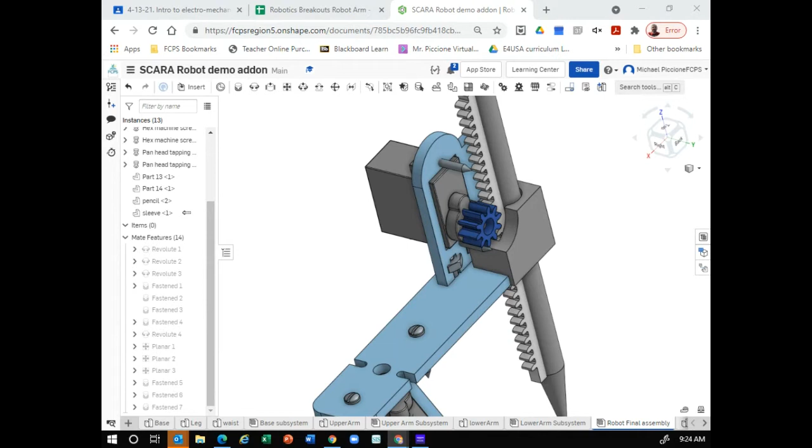All right, so this is how to 3D print something that you made for your arm. If you want to 3D print it, once you've made it, you can find the material, the part over in the menu, and you're going to say export. You want to export it as an STL.

Before you export, make sure your units are in centimeters. So go change your workspace units to centimeters, because when it exports units, it does not export a measurement, it just knows it's so many units wide. So if you export it in millimeters, it makes it really small. If you export it in inches, it makes it really big, when all the 3D printers are set up for centimeters. So right click, export.

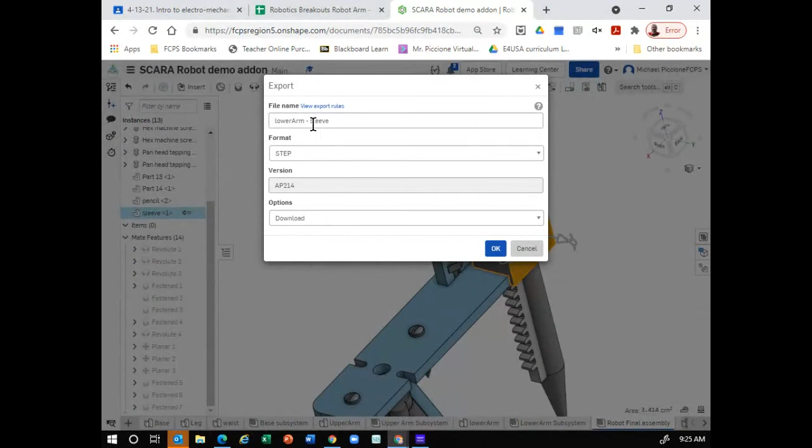You're just going to say download is fine. And it says you'll receive a notification. Takes about 10 seconds usually. There it goes.

Oops, I did a step file. I meant to do STL. Let me do it again. Export. STL, give it a name. Resolution you want fine. Download. Okay.

So now, if you want me to 3D print something, you're going to want to take this file and save it to a certain location. And we're going to save it in my robot file part.

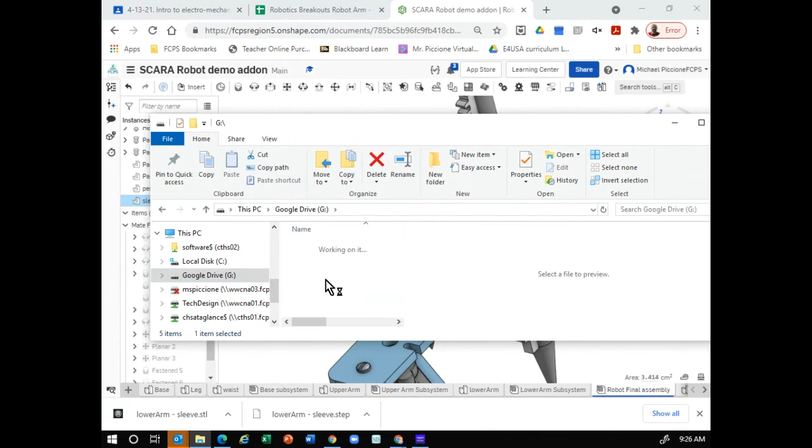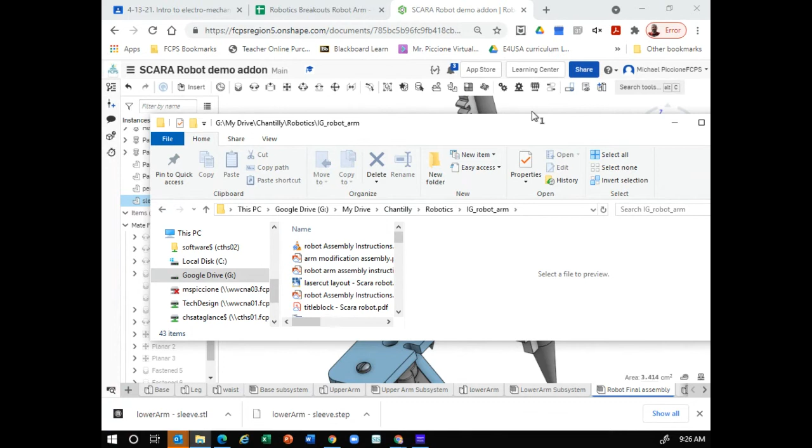Oops. I don't think I copy pasted, did I? Nope. Let's go back to that.

All right, so download, you're going to say cut, go to the location you want to save it to. Paste it there.

Now you can upload this part to the Google assignment, and make sure you put in the Google assignment what units you used to export it as and how many you need. And now I can double check when I 3D print the part for you so I don't mess it up.

All right, so let me go back to my piece here and change my units back to inches for the next step. All right.

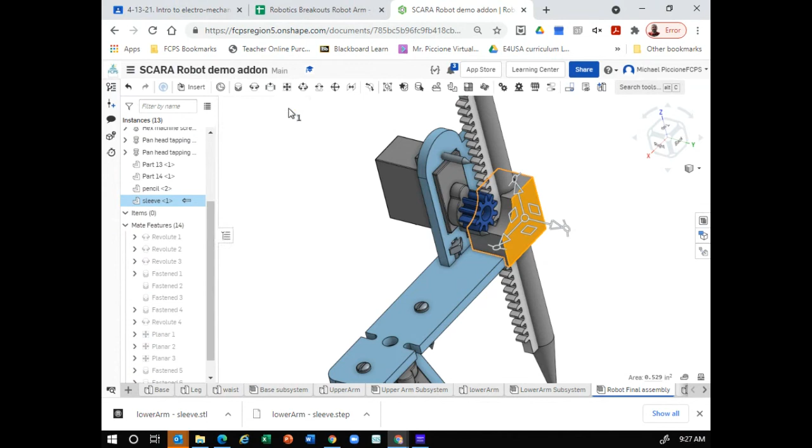So for the last step, you want to lay all your parts out for 3D printing, for laser cutting. So to do that, we want to start a new assembly, and insert all your pieces and lay them flat that are laser cuttable.

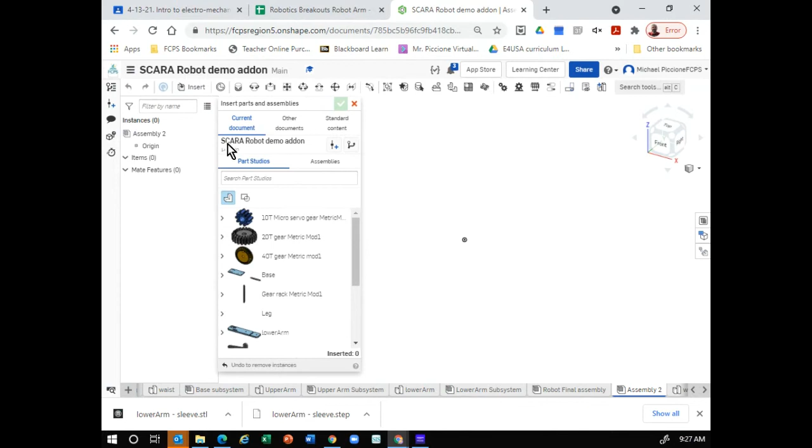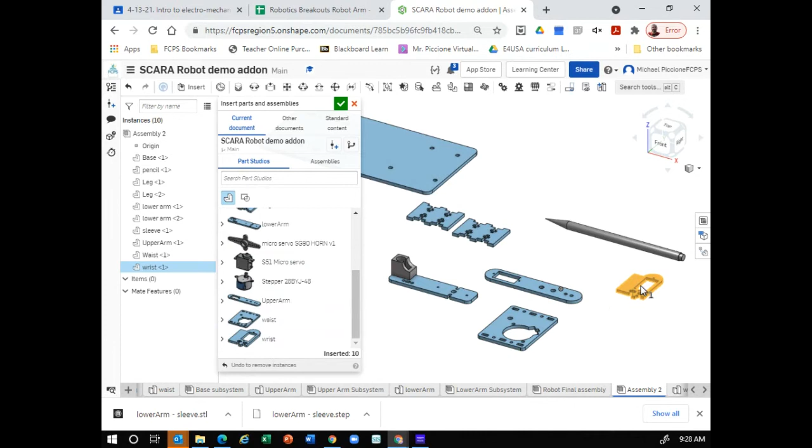So for example, the base, the leg - you got to do the leg twice - lower arm, ignore that piece, we'll delete it in a minute, upper arm, waist, wrist. I think that's all. And then you can delete out all the parts you don't want. So we don't need this guy here. Let's delete the sleeve. Let's delete my pencil.

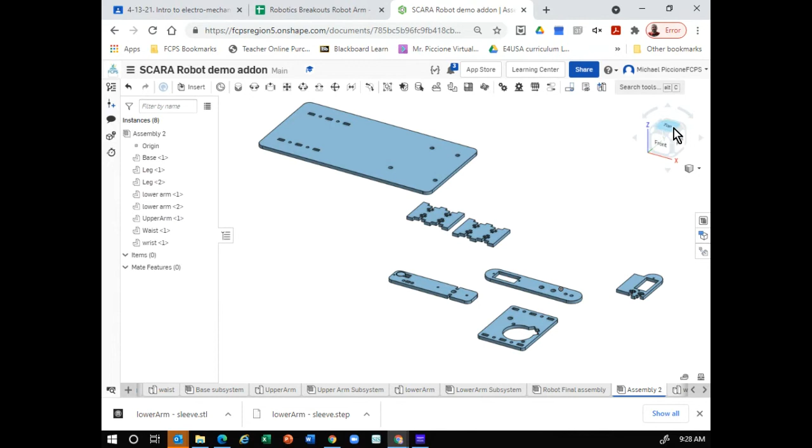So right now you can see they're all on different planes. You don't really need to do planar mates to get them all in the right spot. But what you want to do is lay them all out as close together as humanly possible without touching.

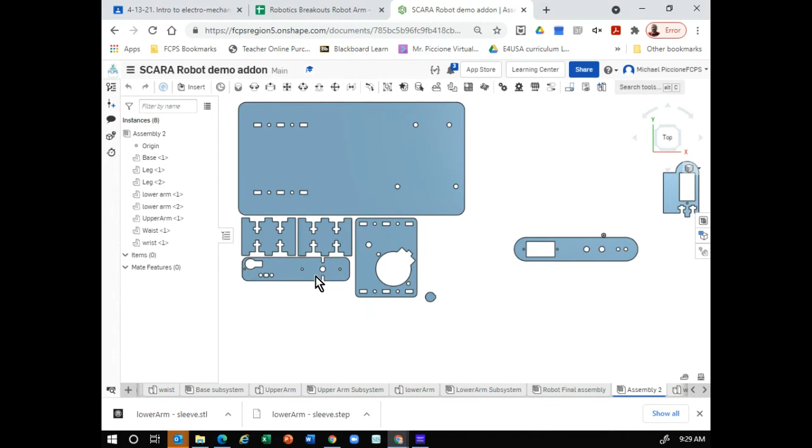You can use rotate if you want, using the transform function if you want to spin things around, but that takes extra time. Oh, there's that little weird mistake I made. Let's delete that guy out of there. So that looks pretty darn close there.

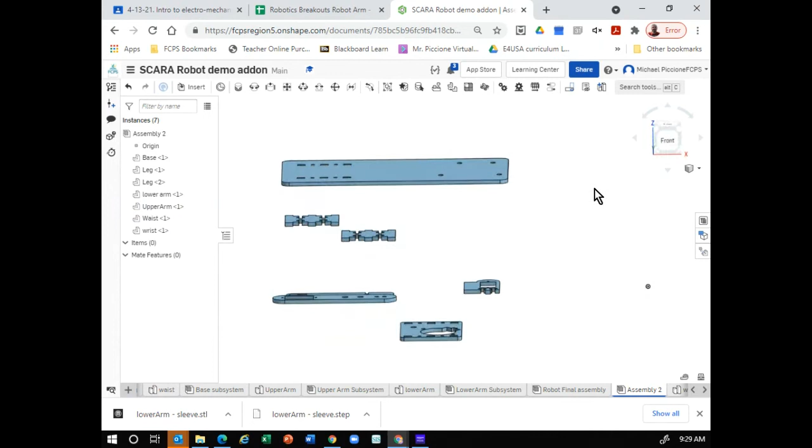The goal is to have everything in a piece of material that's less than a foot. So then you're going to look at the top piece and put a sketch on it. Oh, well, that's right, first we got to say edit in context, I think, in this. Let me see.

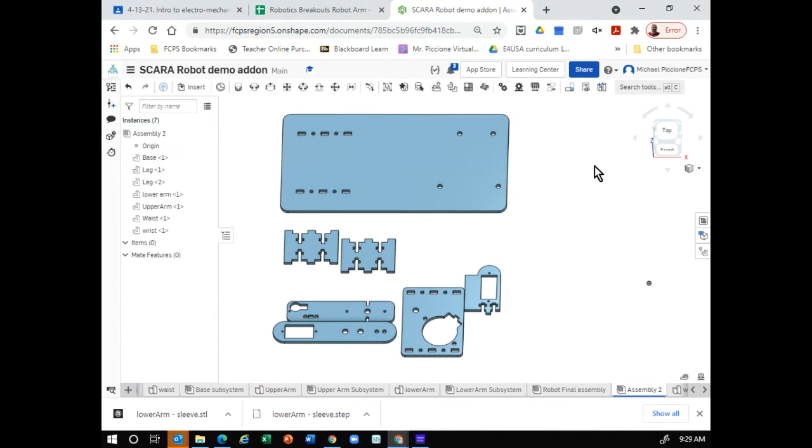Actually, no, I forgot, that's right, we wanted to do... where is that button I want? I think there's a way to create a part studio from this, and I got to remember how to do that. Create part studio in context.

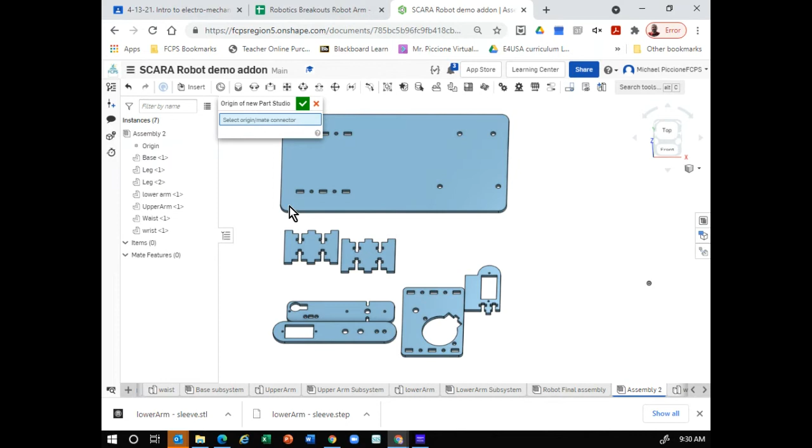The origin, let's see, you got to click a piece. Mate connector. Let's see if I can find something to attach it to. There we go, let's just use the origin. All right, there we go. So now I kind of see an outline of all my pieces.

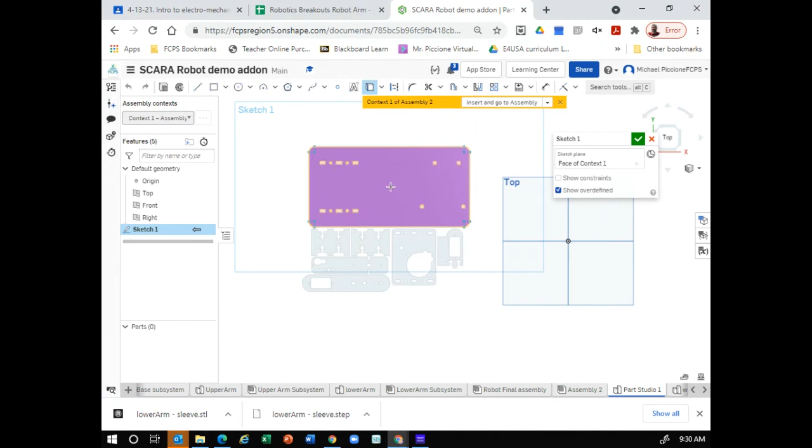I need to make a sketch, and I can do it on the top piece, it's fine. And you're going to project all your edges, every piece, make sure it gets all the details. If you use the rectangle draw tool, it'll grab things too, if you draw a box around them, so you got to make sure you get all of those circles.

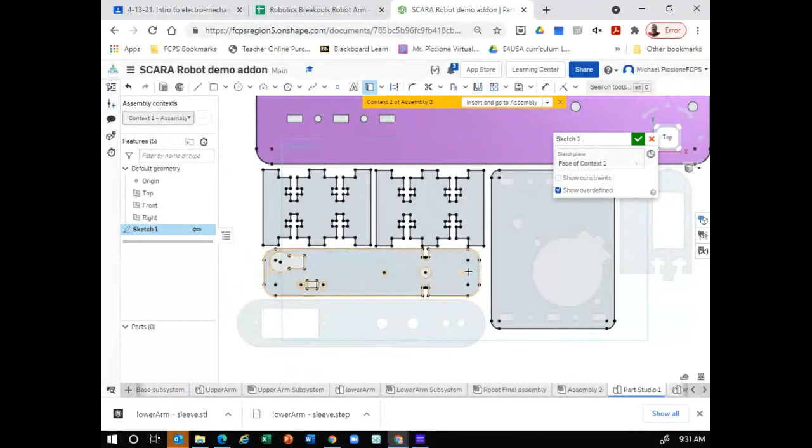It looks like it's still processing. It's going a little slow today.

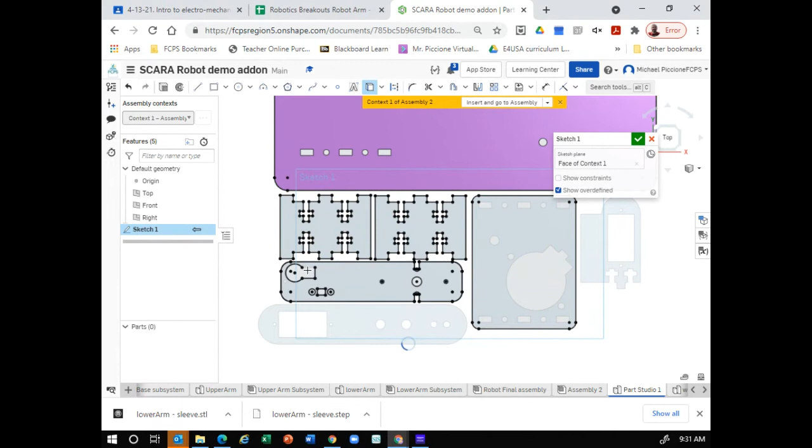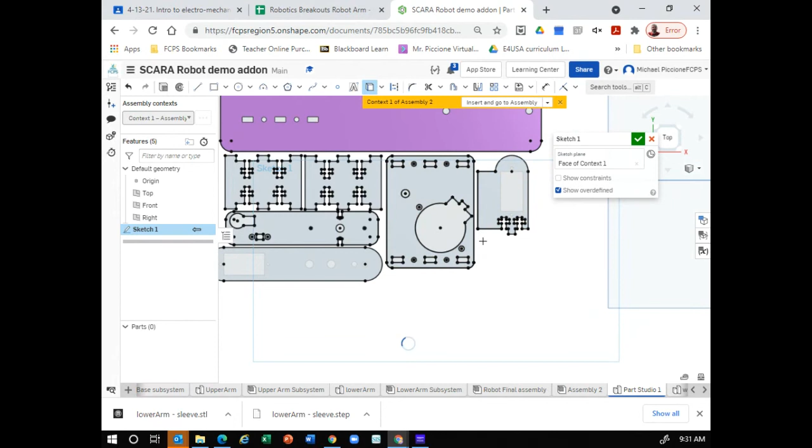You let it catch up and see if I go back and make sure I didn't miss any of the little itty-bitty circles and stuff on there. If you guys miss circles, I'll probably just catch them when I go to laser cut, if they're parts I know about, and I'll just sub in an old part, but I may miss something. So try to do your best to make sure you get everything.

If you need to, you can kind of just zoom out and use a right to left, draw a rectangle, and it selects everything the rectangle touches. And it doesn't matter if we do more than one sketch, or more than one line on top of each other. Now, it doesn't matter.

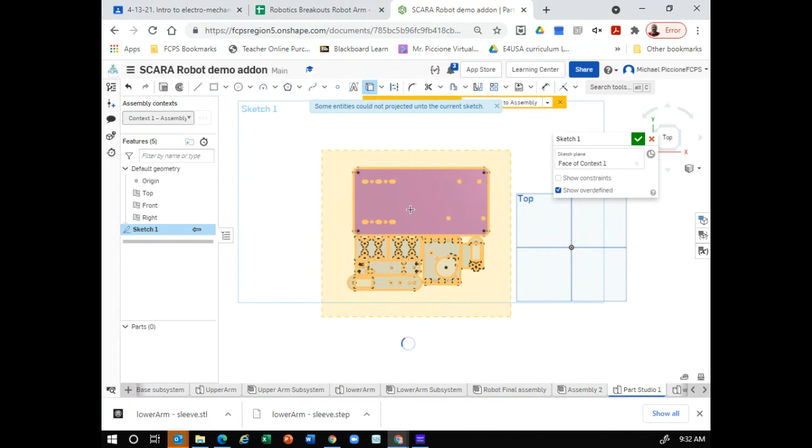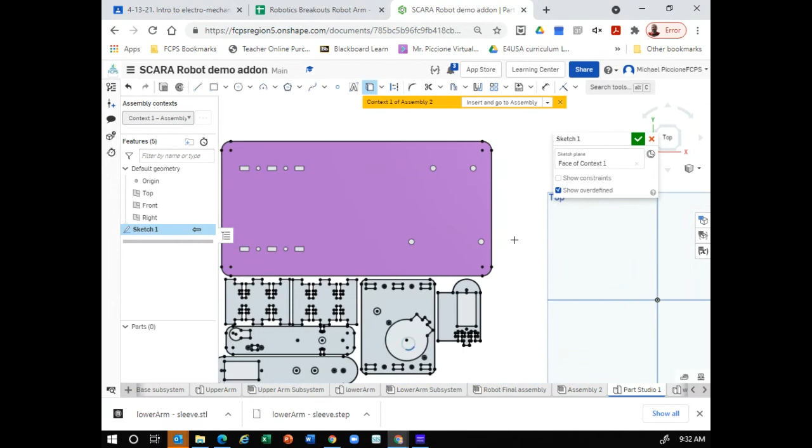All right, I think I got everything. And then to be sure... I can't get these circles here. All right, looks like it missed those circles. Let me go back and see if I can grab those again. Instead, you might need to say intersection, where it projects through the piece, versus use.

This sometimes takes a bit. We can see Onshape thinking here.

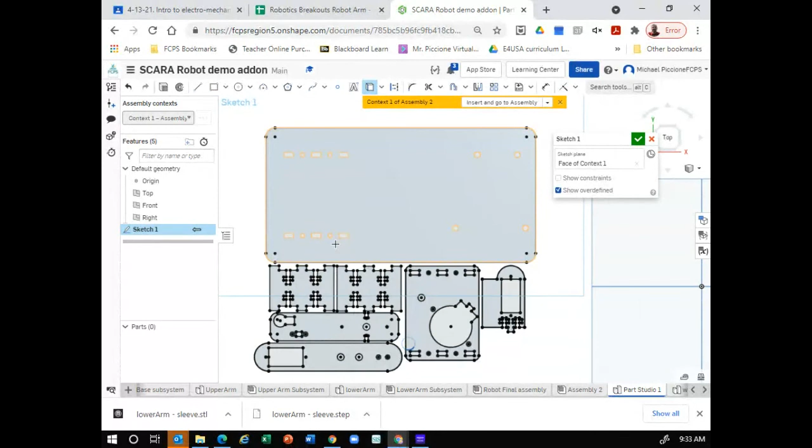If you don't create a sketch on top of the top piece, you can always just create a sketch on the top plane here, or whatever surface is flat, and still use the project method. The goal is just to get all the parts to represent lines that our laser will cut on later.

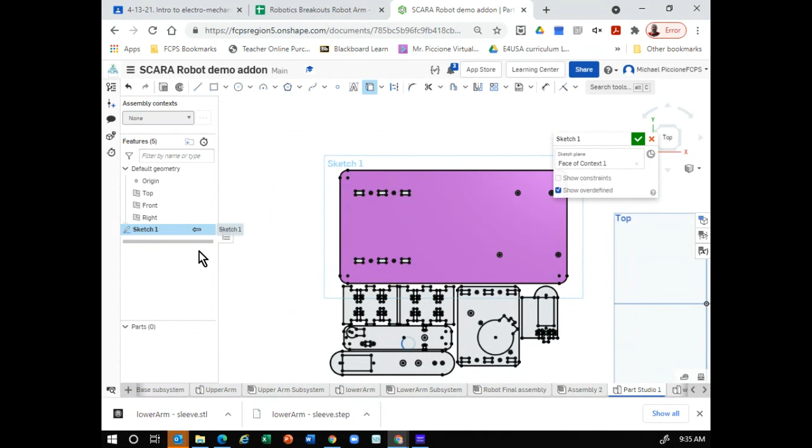All right, let's exit the sketch and see. Now it looks like I got everything on my sketch. Zoom in and check every single piece.

And now when you're done, you take the sketch, right click on it, and you're going to say export as DXF/DWG.

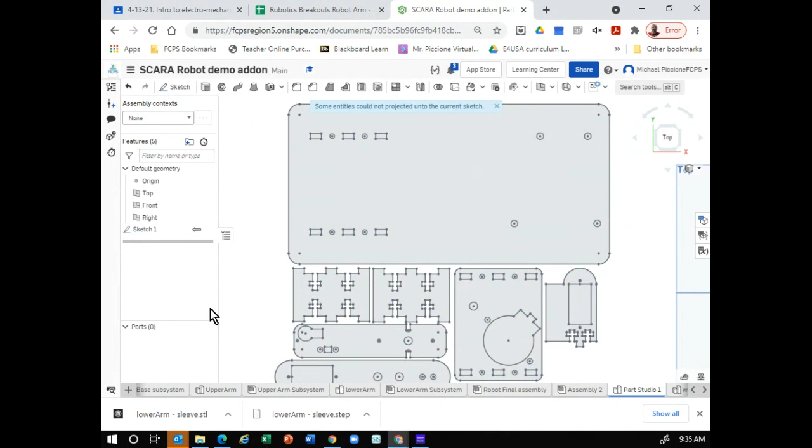Oh, and you want to make sure your sketch fits within a foot. So one way to do that is to basically start a rectangle up here in the corner and draw it 12 by 12, so I can see that your pieces fit into your sketch. The closer you get them together, the easier it is for me to laser cut and less material I waste.

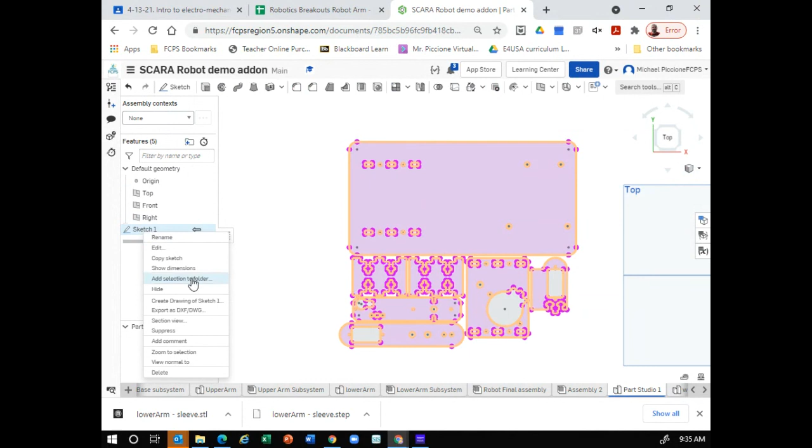So again, right click on sketch one, export as DXF. You want to say DXF here. Release 14 is fine, that really doesn't matter. Store file in new tab - no, you want to download.

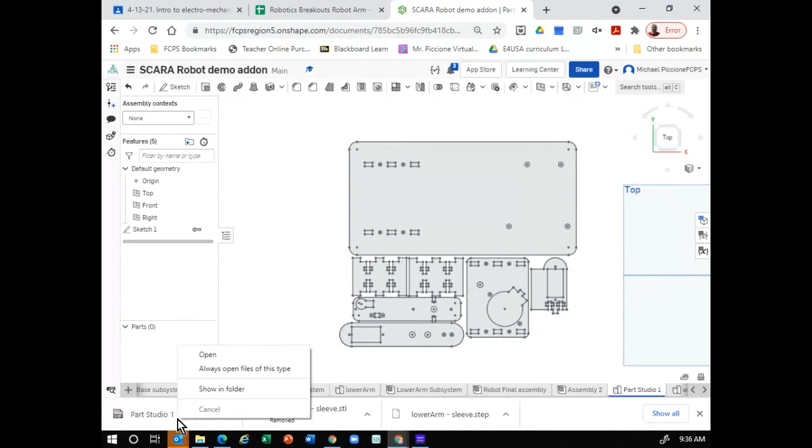And now we have a DXF that will open in AutoCAD, which I can laser cut. So again, you're going to say show in folder.

Cut and move it to the folder where you know where it's at, so you can copy and paste it into the Google Classroom assignment and tell me what to do with it. If you want me to laser cut it, say laser cut and how many you need. If you're a group of 3, make sure you cut it 3 times, all right?

I think that's all you need for this video.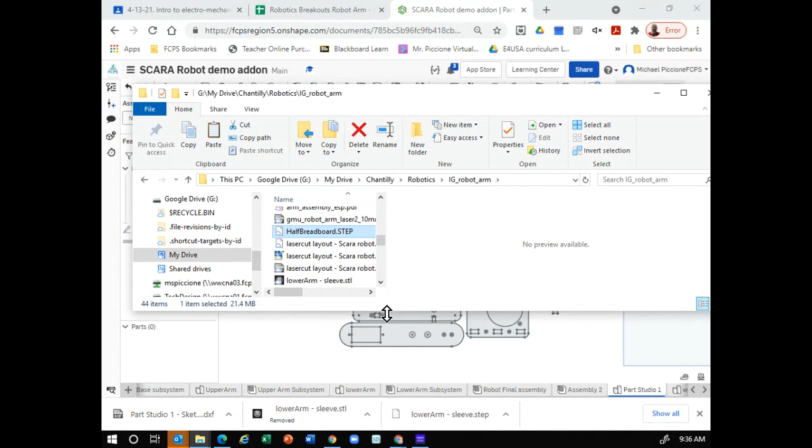So again, make sure to send me this either an email or via Google Classroom and tell me to laser cut it. And if you're 3D printing a part, I need the STL, usually in centimeters, or give me the largest measurement and I can scale it if I need to.